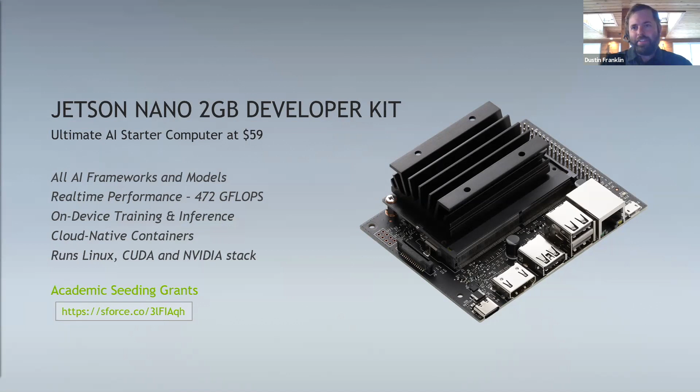So here are the specs of this dev kit. It has a bunch of USB ports, HDMI, Ethernet, and comes with Wi-Fi. It's basically just a small handheld computer, not unlike a Raspberry Pi, but with a lot more compute horsepower on board because of the NVIDIA GPU integrated into the chip.

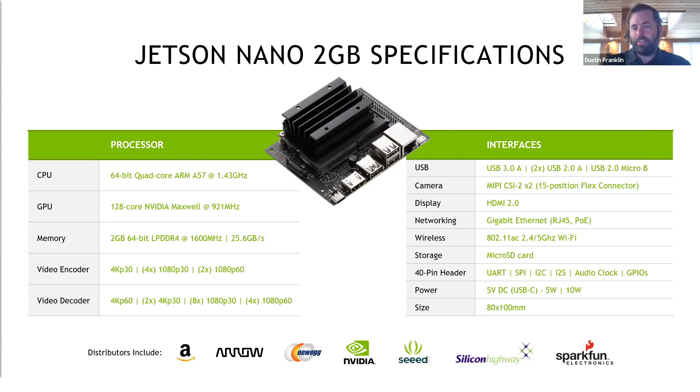There are many other Jetsons in the Jetson family, and they're all compatible with each other. They all run the same software, which is nice from a deployment perspective for embedded projects, because you can pick and choose which Jetson product fits your size, weight, power, and performance requirements. On the lowest end there's the Nano, 5 to 10 watts, half a teraflop of performance. On the high end there's the AGX Xavier, up to 30 watts and 32 teraops of performance. In the middle is the Jetson Xavier NX, small like the Nano but with up to 21 teraops of performance—the nexus of the Nano's small form factor and the AGX Xavier's big performance.

If you're a researcher looking to do pretty high-end stuff, you might look to the Xavier NX. If you're teaching a course or want a lot of devices for folks to get started with, making small autonomous robots like the Duckietown, the Jetson Nano is a really great fit. A lot of devices in the field, like smart cameras, also deploy the Nano into production.

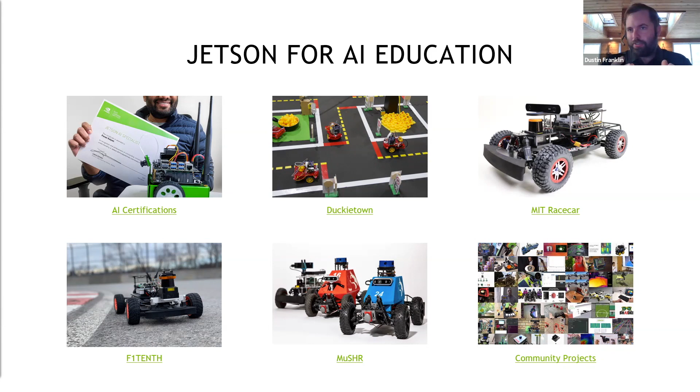In addition, along with the launch of the Nano 2GB a couple months ago, NVIDIA has launched our AI certification program. Essentially, you can get started, follow our tutorials, and then submit a project showing off AI and making your own deep learning model or applying it in some way, and then receive a certification for that.

The course is called the Jetson AI Fundamentals course, and there are two certification tracks within it. One is the Jetson AI Specialist, that's for students or hobbyists, or anybody can get that, and we've seen professionals do it too. Then there's the Jetson AI Ambassador, that's for educators specifically. If you're interested in teaching Jetson related courses to your students, you can apply for this certification.

There are a bunch of perks to that. For example, you can qualify for seeding grants that get you Jetson Nano 2GB for your class, plus other things from the Deep Learning Institute. The Deep Learning Institute is NVIDIA's education group, and they run a bunch of these ambassador programs. We work closely with folks in the education community to enable them, giving them trainings they can in turn give their students.

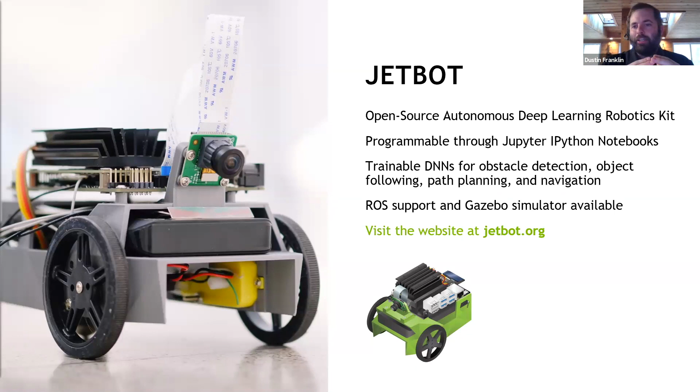And all these kits are fully open source, so you can go in there, and folks have made all new types of autonomous functions for these, which is really cool to see. So here's just a quick video of the JetBot in action. Over here we have JetBot, which is an open source robot that we built using Jetson Nano.

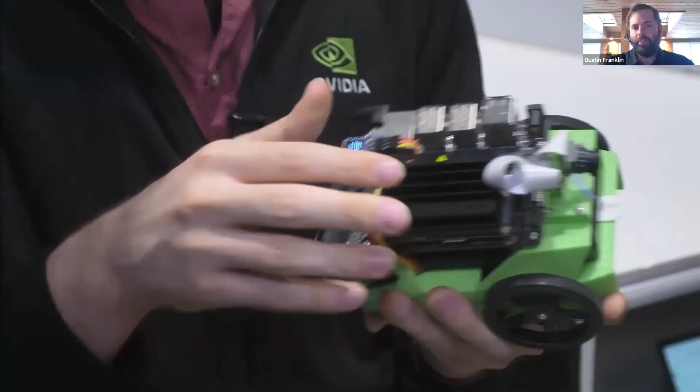The idea behind JetBot was to give people that wanted to start with AI, or maybe AI with Jetson Nano, a platform that they could just get up and running right away. You buy the components of the robot. We have everything on GitHub, so it's super easy to get started.

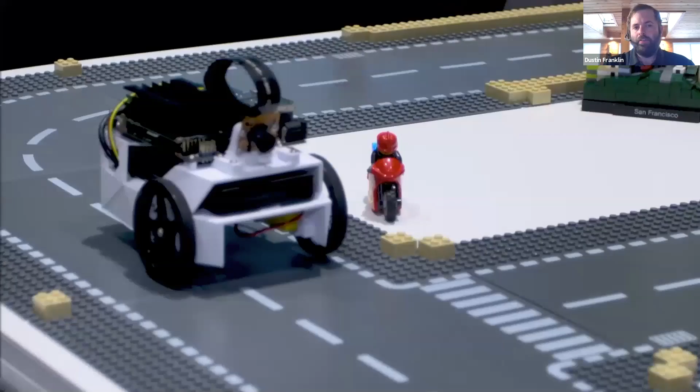It's all done in Jupyter notebooks. So we have basic examples from just controlling it from your web browser in Python - it's super easy to do - to more complicated examples like using AI for avoiding collisions. And then we go all the way to road following, to have an autonomous car navigating a Lego city. That's the basic idea, that you can start with this platform.

It's all open source, the hardware, the software, and then you can take what you learned, you can take the components even, and you could build something new, and who knows what that would be. It would be kind of up to you.

So JetBot started as a 3D printed open source platform. If you wanted to make it, you would get all these components off of Amazon or Robot Shop or Mouser, wherever, and 3D print your chassis, put it all together, and all the software and stuff just came from the GitHub.

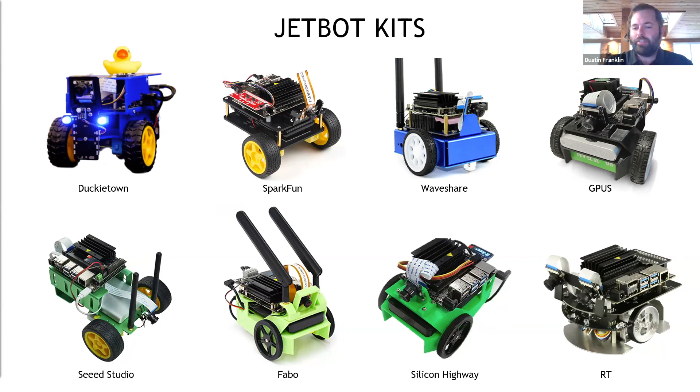But what we've seen is a lot of suppliers in the community, in addition to Duckietown, have actually come out with off-the-shelf kits of this, which make it very easy to assemble and purchase so that you're not individually sourcing all these components. So there's many different JetBot variations now that you can use, and all of these are able to run the shared JetBot software, with very similar capabilities. The Duckietown robot - Jacopo is here to talk about the course they're putting together and running. So with that, I am going to transfer it over to you.

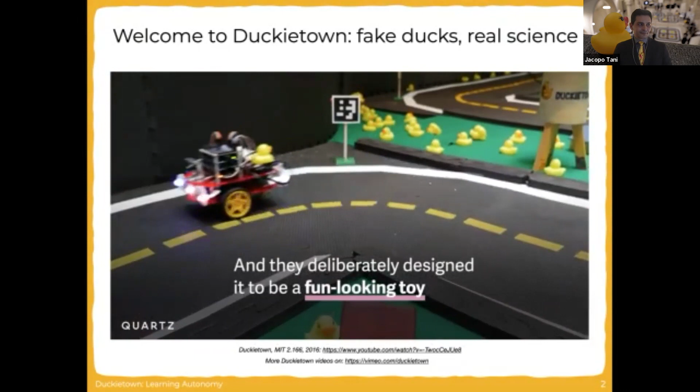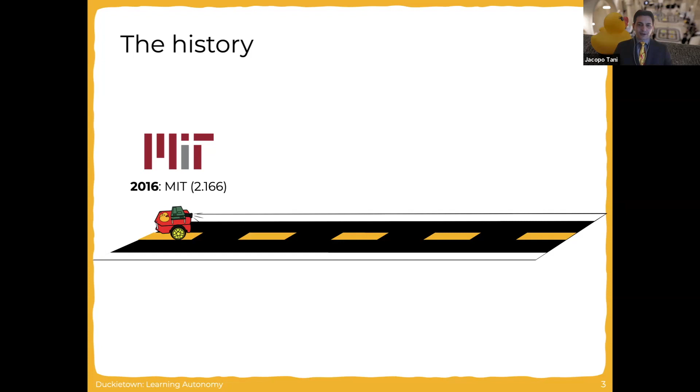This was 4 years ago now when we started building this platform at MIT to teach a course in self-driving cars in a way that was more hands-on, different from the usual go-to-the-blackboard, do-all-the-theory, run-some-simulations approach. The class was built by a number of PhD students and postdocs. The first iteration of the class had literally more staff than students, nearly at a ratio of 2-to-1.

Then all these postdocs started migrating around the world, bringing Duckietown with them. And already in 2017, we started seeing Duckietown being used for research and education in universities on several continents. From 2018, we started losing track fundamentally of how many people were using Duckietown.

We were getting so many requests from various robot clubs, professors, researchers around the world that wanted to join the community and start building their small cities with their fleet of self-driving cars, that we wanted to make the whole process easier. So we did a Kickstarter and we created a pipeline to basically allow delivery of the Duckietown hardware in a very standardized and quality-controlled way internationally with one click.

In 2018, we even ran our first edition of the AI Driving Olympics, or AI-DO, which is a scientific competition that we run since then biannually at ICRA and NeurIPS for the finals. It's basically a provocation - AI-DO, can AI actually do anything in the real world? We're trying to collect from the broader community solutions to various challenges of increasing complexity, and comparing the various machine learning solutions to typical traditional approaches to robotics, to see if the embodied AI system works in non-trivial scenarios.

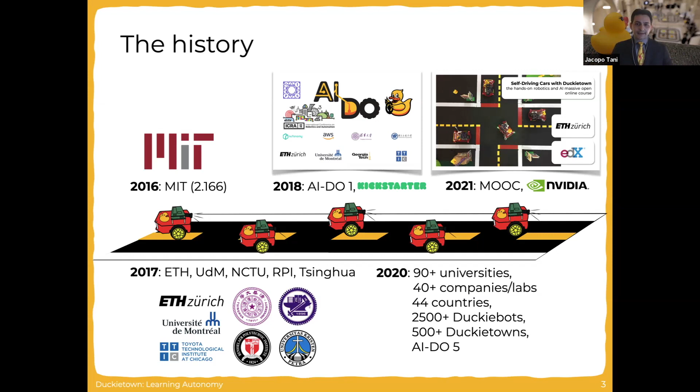Next year, as Dustin previously mentioned, we are going to be launching a massive open online course on edX. It's an international collaboration led by ETH Zurich together with university partners, including the University of Montreal and the Toyota Technological Institute at Chicago, with the support of edX and NVIDIA. This course is, to the best of our knowledge, the first robotics and AI remote learning massive online open course with hands-on experience with self-driving cars. So every student at home can receive a small little city, a robot, an NVIDIA-powered robot, and a little urban environment, and follow along with all the various classes.

The Duckietown project was born, as I mentioned before, for educational reasons, but really it was driven even by a research purpose. In our lab, we do lots of mobility research, and we were missing a link between doing everything in simulation, testing autonomous mobility on demand systems, control systems for fleets of self-driving cars, and the real world. Getting a real fleet of self-driving cars to drive around in town is very complicated and very expensive. So we built Duckietown to be some sort of experimental simulator to factor in the challenges of the real world, without having to have millions of dollars and convince legislators.

So it began with this graduate level master's degree set of pedagogical materials and learning experiences. And the idea being that all the staff and the students participating in the first editions of the course, as part of the course itself, would get in groups, make projects, and each one would be developing a different aspect of the whole autonomy pipeline.

From the team of students that did lane following to the ones that did LED recognition, the coordination mechanisms, and all of that. All these pieces of code ended up being part of a single corpus that was shared with the broader community. The whole code is open source. You can go on GitHub and find the Duckietown GitHub repositories. The idea being that thanks to this initial push of the more expert students and contribution from the broader community...

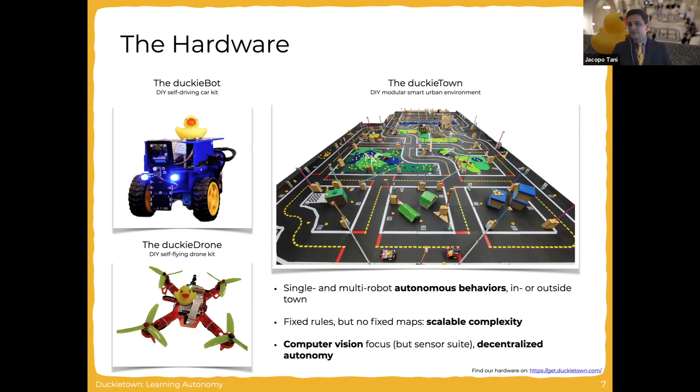And we have a parallel drone initiative as well, which is led by Professor Stephanie Tellex at Brown University, which is more targeted towards high school. We already did a number of pilots in Rhode Island schools, and shortly we will be bringing everything together, creating this land, air, and smart city environment where autonomy is obtained with a focus on computer vision, although there are a number of other sensors on the various different robots. And the whole system is really created in a way that behaviors of different complexity can be easily scaled.

On the software side of things, the whole Duckietown system is built using common tools that are used today for doing robotics and AI.

So we have Docker, we use Python, ROS, GitHub, and of course there is a backend user experience glue. That is what Duckietown provides to really make it easy to pass between the theory, which is the slides and exercises and operation manuals, to actually implementing into both the simulated world of Duckietown as well as on the hardware.

So we put lots of work to standardize the interfaces and make it as easy as typing three lines of code to, for example, train a machine learning solution on either real data from the robots, from our simulator designed on purpose for learning, or from a database of logs of other robots around the world. And with another line of code, we can then evaluate performance.

The performance of this agent, designed either in simulation or on hardware, both locally or in remote facilities. We call them the auto labs, which are nothing but the big cities you saw before. These are smart Duckietowns that are able to localize the various robots and therefore track the paths and create all sorts of performance metrics out of the specific tasks that the agents are trying to solve.

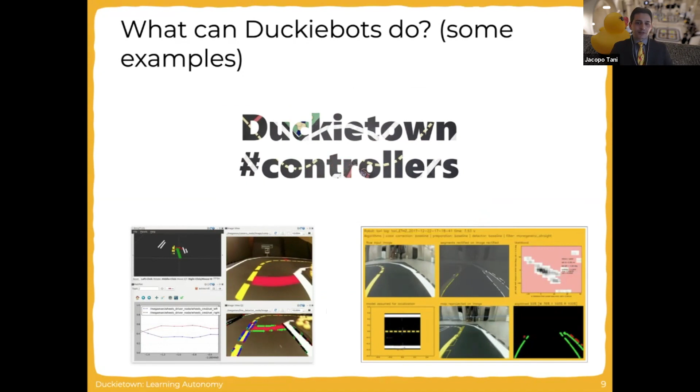Well, they pretty much do what you would expect from a self-driving car. So what we're seeing here is maybe one of the simplest, the standard lane following image pipeline. This is of course running in a decentralized way.

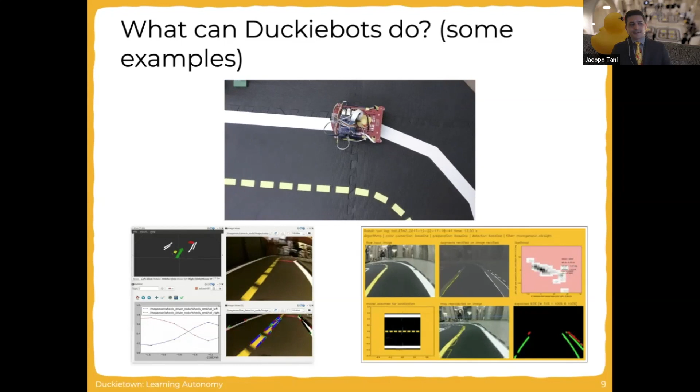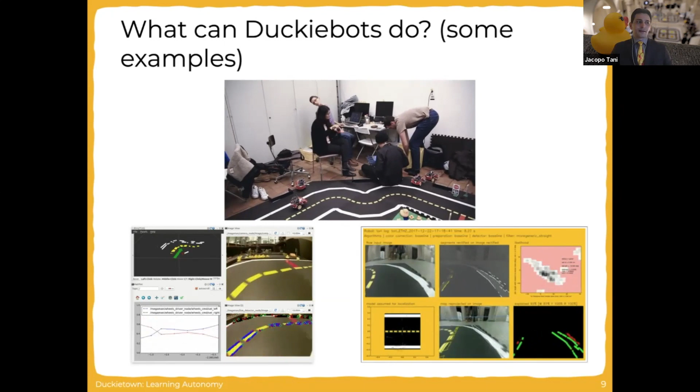So all sensing, decision-making, and planning is being done on board. And we see the images coming in, we see the various pre-processing being done: the rectification, the color correction, some feature extraction. In this case, we see the edge detection of the various lines in the lane.

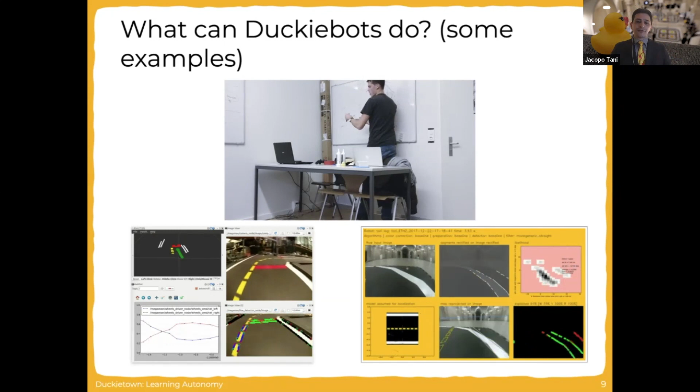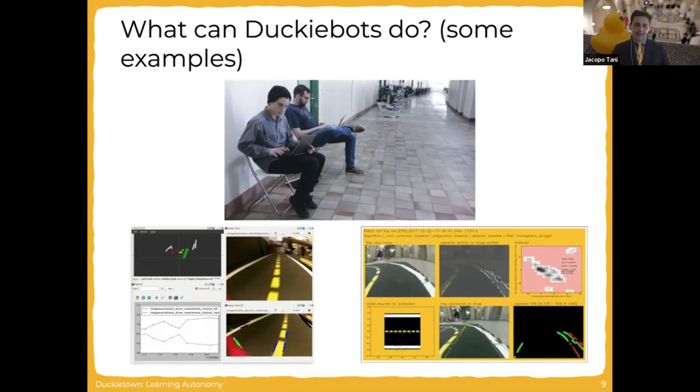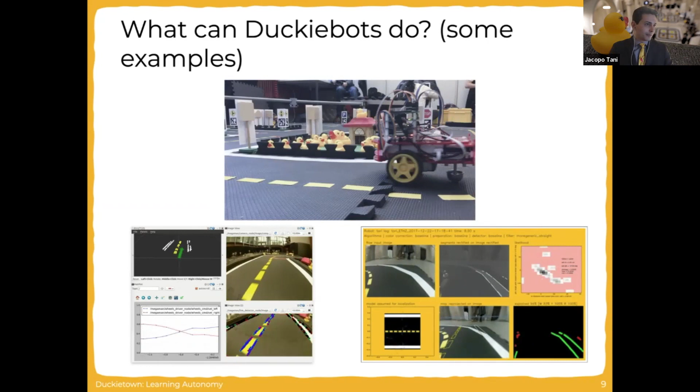And then by leveraging a mathematical model of what the city should look like, and data from the calibration of the camera, robots are able to reproject and recreate basically a 2D image of the world around them, and localize in real time in it by using a recursive Bayesian filter, implemented in a discretized way through this histogram filter you see in the top right.

And of course, being the platform decentralized, this means that this is running on every robot and there's no limit to how many robots you can put. There's no eye in the sky, there's no super server. And so there's lots of...

Multi-robot behaviors that can be developed, from coordination at intersections, trying to yield to other robots at the same intersection, trying not to crash, to doing planning or obstacle avoidance or formation control. So trying traffic management, let's say. There are many, many possibilities that arise from having this modular ecosystem.

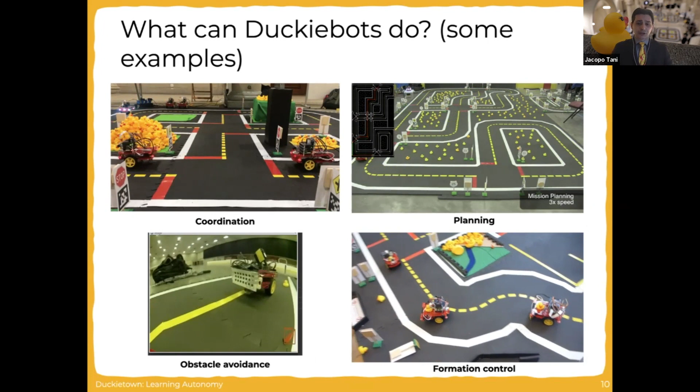Duckietown is used for education and research. In the teaching domain, we have developed Duckietown courses of different levels of complexity, from a more hands-on introduction to robotics that stresses the operational setup and execution part of the discipline, to more advanced autonomous behaviors, and of course all the more recent machine learning applications.

But Duckietown has been used a lot even as a support for traditional courses. For example, when I used to teach control systems, I used to have students implement the controllers on various Duckiebots, so it's possible to hide under the hood much of the complexity that may be unnecessary for students at the earlier undergrad level doing specific courses, and really make them play only with what is of interest to them. The Duckietown courses are designed to really be hands-on, of course.

The whole idea was to create a platform where students could get together, see the theory working or not, often not in practice, and build a complex platform that demonstrated non-trivial autonomous behaviors. So we have this project-based structure.